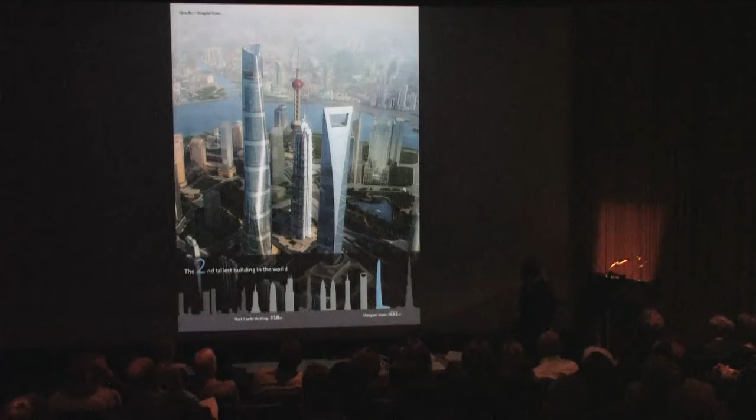But we toyed with the idea of making it taller, making it the tallest. We felt that the design didn't work, and quite frankly, I think the Chinese government said, you know what, we don't want to be the tallest, we want to be the best. So we backed down from being the tallest, but it is the second tallest. And I'm sure there will be others that are taller.

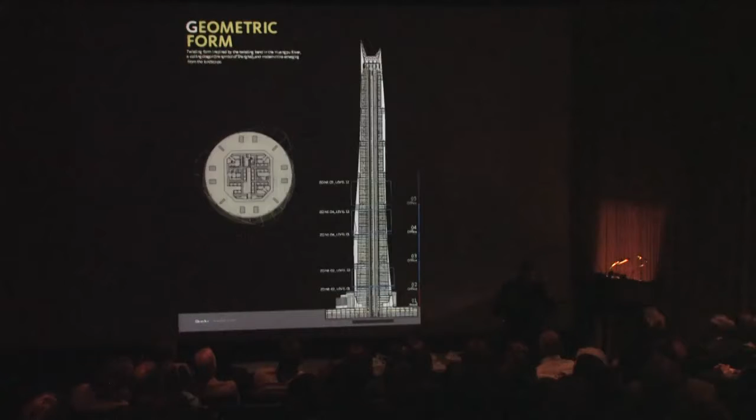So the question always comes up about the form. A lot of people call it the Dragon Tower. It was never the idea of a dragon. It was never anything part of the original concept.

The form was really derived from a bend in the Huangpu River. The bend actually makes a turn. If you draw your hands around the three buildings, they almost form a perfect triangle. So it was a bend in the river, a relationship which is good feng shui between the three buildings. It was the idea that it comes up and it's emerging and it's sort of turning, so it was a dynamic form, and that was the symbolism associated with this emerging China.

And it is a pretty simple building in the sense that it's got a round core, and I can show you later, and then it's got a sort of inner circular form, and then there's a second curtain wall. There's a dual curtain wall, double curtain wall system, and the second curtain wall turns around the inner one.

It's retail on the first floor, and then there are these zones, and each zone is broken by a mechanical floor and what they call a refuge floor, which is required in China so that if there's a fire, you can go down to a refuge floor and not have to get out of the building. This building will house about 10,000 people.

So as we've been working on this, we've been in many, many ways writing the high-rise, super high-rise codes in China, because a lot of the codes don't exist. In fact, this is the first building in China that you're going to be able to use elevators as a means of egress.

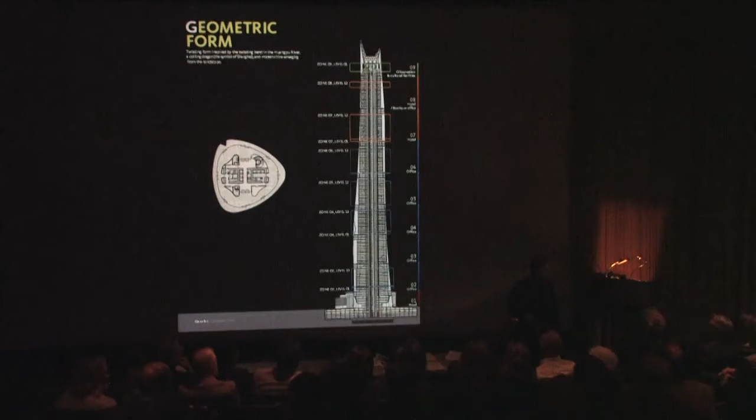The idea behind it is it's stacked neighborhoods. So each neighborhood, this is one of these sections here, is considered to be a neighborhood. There's what we would call a sort of podium level, and then each one of these neighborhoods has a 14-story atrium space. So you're stacking buildings on top. They're essentially independent buildings stacked on top of one another. Center core, turning skin, and as this triangular form turns, it forms an atrium.

It forms an atrium that varies from about 27 feet to about 36 feet, going up the entire building. So you can see this is an atrium space, and as it turns, it's on the back side of this building. It's the idea of trying to take - the tough thing about a building like this is how do you deal with the scale? How do you deal with something this large? If you've ever been in any of the buildings in China, this is a really tough scale to deal with, and how do you break it down?

The other goal with this neighborhood concept is that if you go into the Jinmao Tower, the KPF building, they're essentially closed buildings. You can go in, go to the retail, go up to the hotel level and the observation level, and that's it. You can't do anything else. You don't even know what's going on in the building.

These neighborhoods are all going to be open, and there's going to be cultural events on each one of these atrium spaces. People are going to be able to enter the building and actually go through the entire building, not just the observation floors, but essentially all the other floors.

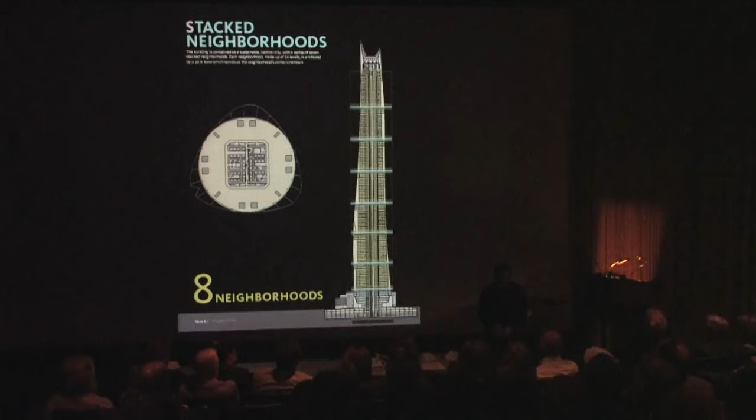Shanghai - I just took my wife there recently, I don't know if any of you have been to Shanghai - but the idea is that it's a city of parks. There's parks everywhere, and they're beautifully maintained parks in Shanghai. So these atrium spaces are also what we would call parks. You can see how large they are.

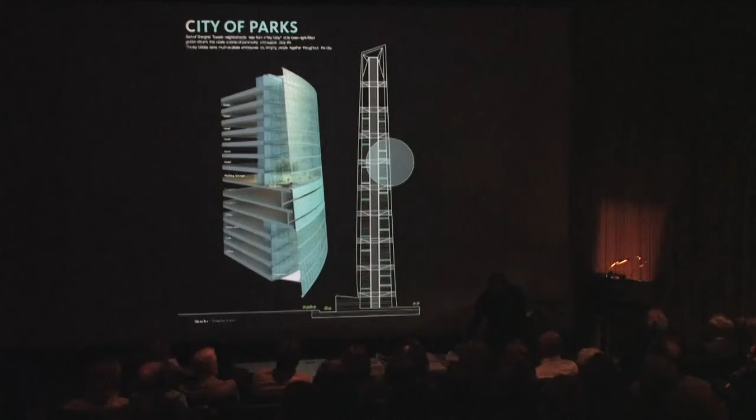Here's the one below it. Here's the refuge floors, right? Mechanical and refuge floors here, and these are the atrium spaces. It's this idea of neighborhoods, a city of parks. People don't necessarily have to leave the building to go to lunch or go to a cultural event. They can go down to any one of these parks, and there's different things going on. This is part of the basic concept of the building.

Now, the toughest part - I was talking to Dr. Walker about it today with the engineers, because there are a lot of engineers that said this building couldn't be done. It's because the center core is a dual curtain wall system. This is the center building, and this is a typical curtain wall system, so you've got just a cylindrical building with the curtain wall adhered to it, right? Which is easy to handle structurally - it's right there.

Now, this curtain wall system, the outer curtain wall system, which is 30-some feet away minimum, how is it supported? How do you build it, right? Because it's easy to build when it's up against the concrete structure. Originally the engineers said it couldn't be done, then they said it couldn't handle the wind loads, and there are some engineers today that would say it can't be done. We had over 100 expert panels - Chinese panels of experts and people from around the world - looking at all aspects of the building, and the curtain wall was one of the most important.

Essentially what it is, is a bicycle spoke. So the main core of the building is the center of the wheel, and these spokes come out, and actually what happens is the curtain wall is hung from above, so it's basically on a cable structure. Now the most complicated part is really building it, because there's nothing to support this. So basically all this is going to be built, curtain wall is going to go on, this structure is going to go on, and then we're going to hang these rods, and then the curtain wall is going to basically go up the rod system.